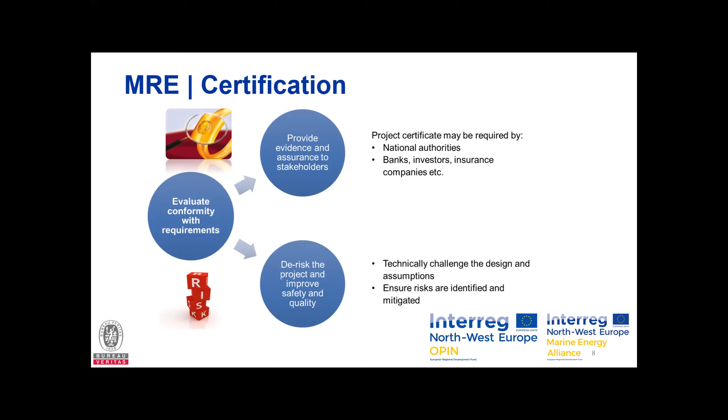As I said before, you don't have only one certification scheme, but several, depending on your project and the maturity of your project.

Let's start with the approval in principle. Typically, it will apply to a designer who develops a concept. A concept is sometimes not linked to a project, so at this stage there are still many uncertainties on some components of the product or on the environment. Typically, a designer or a floater for wind turbine may propose something, but they will have taken some assumptions on the turbine that can be selected for a concrete project, or also on the environment. The product can be designed typically for the North Sea environment or Mediterranean Sea environment, so it's a choice.

As a certification body, we propose to issue an approval in principle, meaning that we will review globally all the documents pertaining to the project, considering the assumptions made by the designers. So it's kind of pre-certification or a feasibility study. The first objective will be, once again, to de-risk the project, but also to make sure there is no showstopper in the design that may prevent further development later on in case of a project.

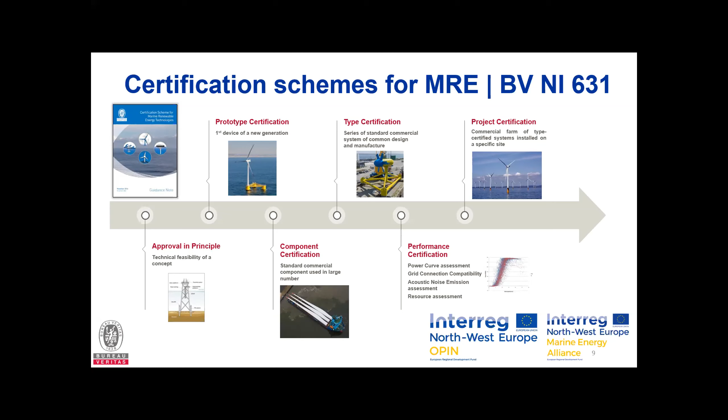So now we'll deep dive into the project certification. The first objective, once again, will be de-risking the project, and for that we'll have special care applied on the interface control. Once again, if I mention typical offshore wind projects, you have several stakeholders: the RNA manufacturer, the designer of the floater, and the project developer. Each of them will have some specific scope of work with boundary limits which are clearly defined. But what happens at the interface between the two designers can be a concern. As a certification body, we'll make sure that the inputs coming from one designer are considered by the other.

Typically, if the designer of a floater is in charge of generating the RAOs, so the response of the hydrodynamic response to the floater, they will have to inform the turbine manufacturer of the floater response so that it can be considered in the design of the RNA and the tower. The certification body will also verify all these interfaces. It concerns each module of the certification - I will come back to that. But it's not only the basis of methodology, but also the loads that will be verified by the certification body, and the detailed design, meaning the structural drawings will also be verified.

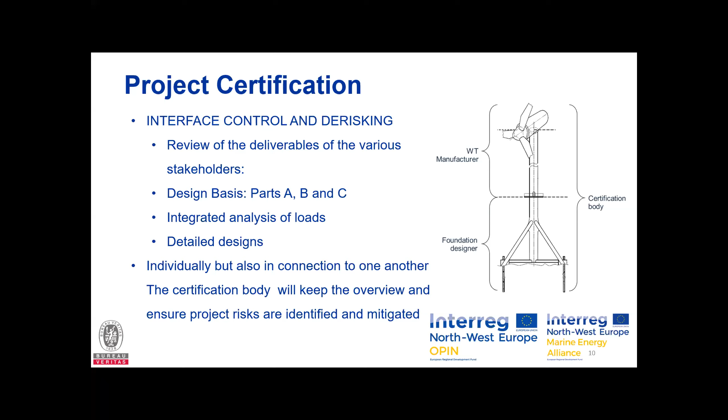Here, basically, we will review everything related to the geosciences and the environmental conditions: wind, wave, current. That will be, in fact, the data for the next phases.

Second is the design basis evaluation. The design basis will list the different technical standards applicable to a project for the wind turbine, the floater, cables, everything, and usually it's split into several documents. You will have design basis part A, which is about site conditions and employer requirements, because sometimes the project developers will have specific requirements to be considered by the designers. So it will be in the design basis part A.

Design basis part B will focus on the RNA and the tower, so typically it refers to the scope of work of the turbine manufacturer. Design basis part C, usually, is for the foundation, floating or fixed. You may have also, optionally, design basis part D that will cover the interarray cables or the substations, if any.

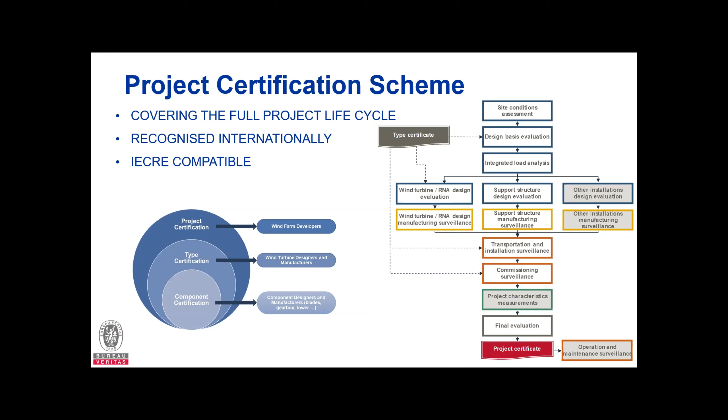So I've described the general context of the project certification. As I said, in the design basis, the technical standards applied for the design will have to be mentioned. And in BV, we have also produced a technical guide for the classification and certification of floating offshore wind turbines: NI 572, which will give some technical requirements to be fulfilled by the designers.

It was released, revised, in January 2019, and now it focuses mainly on the design phase, not so much for the moment on the manufacturing and in-service phases. It will address all the different components of the project: requirements on the material, the design loads, the stability, the structure, scantling, the mooring system. Everything is considered in these guidelines.

Just to give you an example, I will give you the example of corrosion, how it's addressed in these guidelines. We have defined a plan for the corrosion protection which will consider differently the internal and external surfaces, but also the design life of the structure. When I say design life, it should also include the installation life. So typically, if we say the design life is 25 years on site, the corrosion protection should be designed for this specific life.

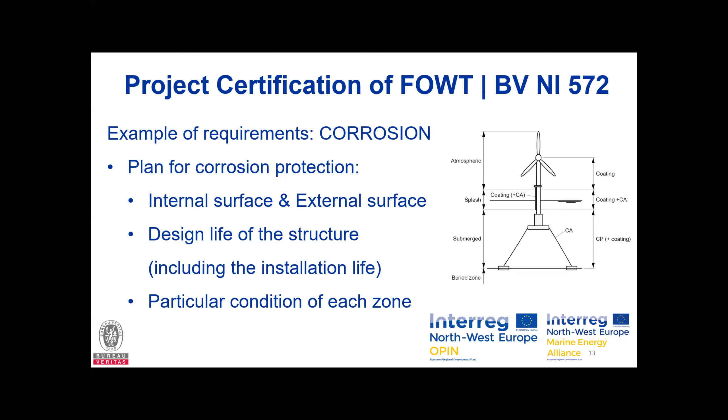For each of these zones, we specify different corrosion protection methods. At the atmospheric zone, we will just ask for a coating. For the splash zone, which is most sensitive to corrosion, we'll ask for a coating plus corrosion addition—I will come back to the definition of corrosion addition. Finally, for the submerged zone, we'll ask for cathodic protection and eventually coating depending on the type of component. Typically, if access is difficult for inspection, we may also ask for a coating.

So I said that usually we will ask for a corrosion addition. Corrosion addition is in fact a corrosion allowance that you will consider in the design of your structure. When you perform your structural calculations, you will have to deduct a thickness representative of the corrosion loss seen by the unit during the full service life. To calculate it, we give some values in our rules as guidance, because it can be different if justified by the designers.

What we suggest is to use a corrosion rate of up to 0.1 millimeter per year. And of course, you will not apply it to the full design life, because you will also consider the coating, if any, so you can remove the coating life.

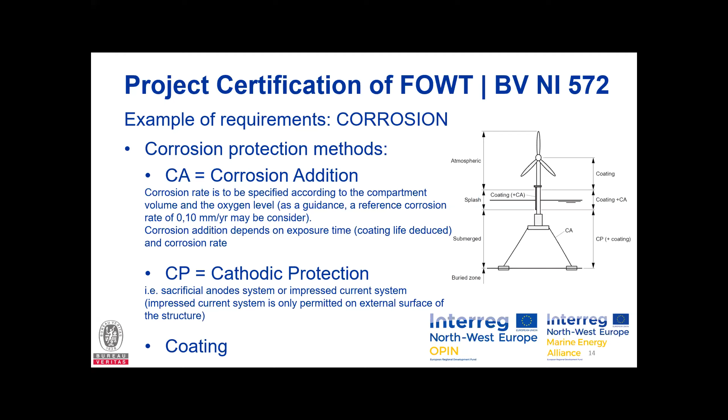Okay, so that's it for my presentation. I will take questions at the end of the webinar.

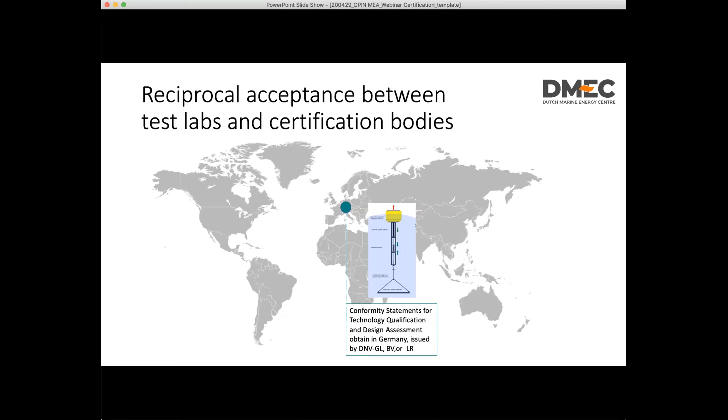The same kind of terms my colleague mentioned. Now, the next step is you've raised your capital and you're going to test, and you got access to a test berth at EMEC, an open test facility on Orkney in Scotland. They're accredited under the system to do power performance testing and assessment of tidal energy converters or wave energy converters. So you test your device there, and they issue a test report under the IECRE system.

Again, you use that as part of your documentation to build up credibility around your technology, to de-risk it and raise capital, because you want to borrow money at the lowest rates, and you can reduce rates and internal rates of return by presenting a credible route to market.

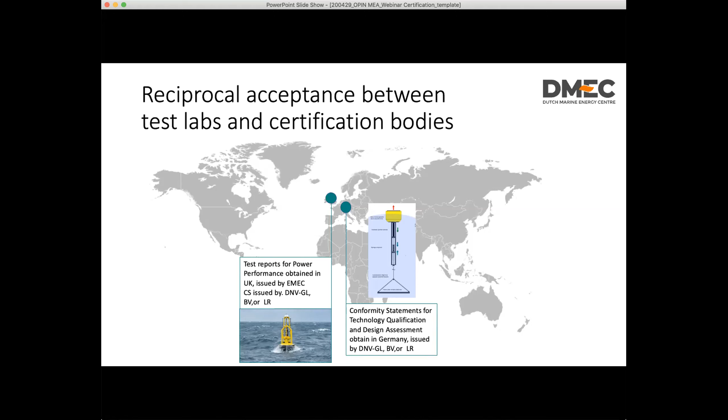So your next step is that you're going to manufacture and sell a project in Japan. The manufacturing takes place locally, and it's also done as an assessment, maybe with a local ClassNK as a certification body, working under the IECRE system. This whole process may take a couple of years if you've got experience in the sector, but all the documents you build up will work towards that prototype certificate, type certificate, or project certificate.

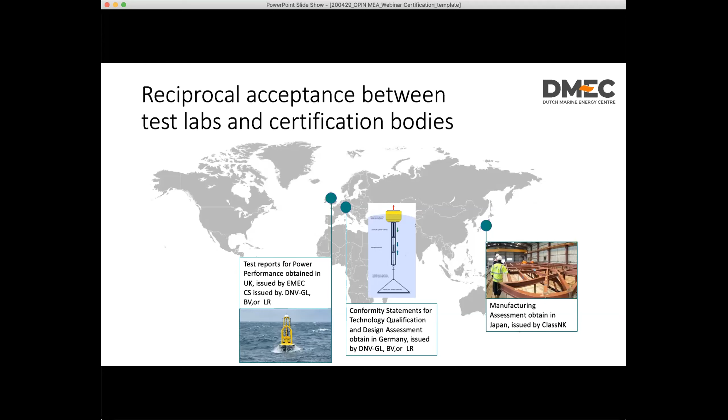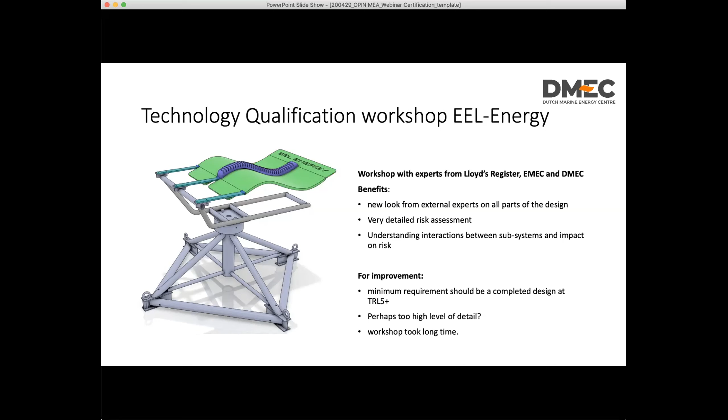So what I started with is that I would like to invite people to become more involved in the IEC. It will help you to get access to early market intelligence. It is a network of over 100 experts worldwide in 26 countries.

So yeah, in previous times, we would always get together somewhere in the world, and probably in the future, there will be, we look forward to that possibility again, but you hear a lot from each other on what is happening in different continents. It will also help you to focus on your innovation because it gives you a tool set to apply, a common language.

And by applying this, you really open up global export for your technology. You reduce risks, you increase confidence in your technology, and thus get access to commercial funding. So this is my presentation. Thank you for your attention, and I give the word back to Laura.

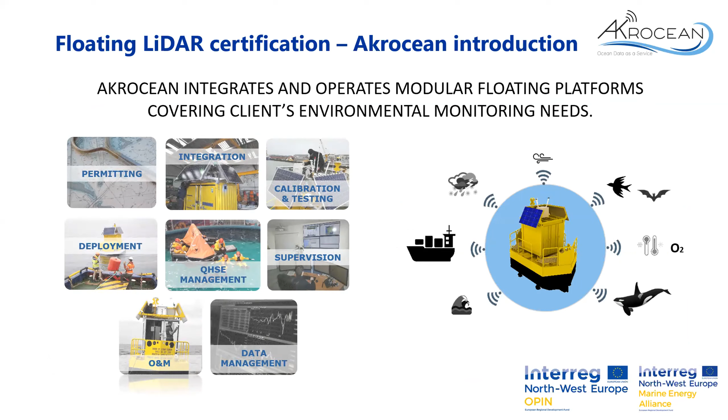We have developed 3 services today. The first, for offshore wind assessment, is a floating LIDAR — a system that assesses the wind conditions of an offshore site. We are also developing a bird and bats assessment service through a floating 3D radar, a system able to assess bird activities on an offshore site before any construction. And more generally, a full sea observatory station to assess the initial site conditions of an offshore site.

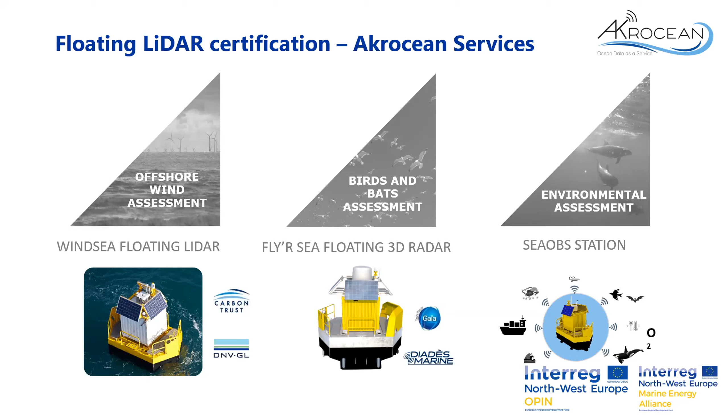Our current projects: our first experience was with Meteo France 3 years ago, for a 1-year commercial wind resource campaign off Oléron Island in France. We have recently won a 4-year master service agreement with Meteo France, for measuring wind and metocean conditions on new French offshore wind areas — representing around 5 to 6 campaigns over the next 4 years. We have deployed a system, which I'll talk about later in my presentation.

For the certification of our system, we deployed it close to a met mast in the English Channel. We have also performed tests offshore Rotterdam, to check our new systems are compliant with the roadmap. Recently, we have secured a contract with Energinet, the Danish national transmission system operator for electricity and gas, who are in charge of assessing new offshore wind areas in Denmark, similar to Meteo France in France. Also last year, we started a 2-year wind and metocean campaign for the Star of the South offshore wind project in Australia, which is one of the biggest offshore wind developments in the world currently.

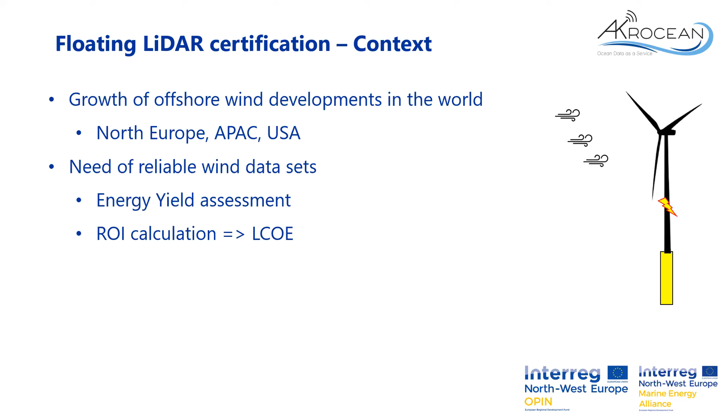There is a need for offshore wind developers and investors to get very reliable wind datasets, because the wind dataset will be the direct input for the energy yield assessment, which helps calculate the return on investment for the life cycle of the project.

And that directly contributes to the LCOE of the project. A last element of context: today there are new techniques and methods of wind measurement, especially LIDAR technology. LIDAR is a recent technology that was replacing met masts onshore, and that's now the case offshore.

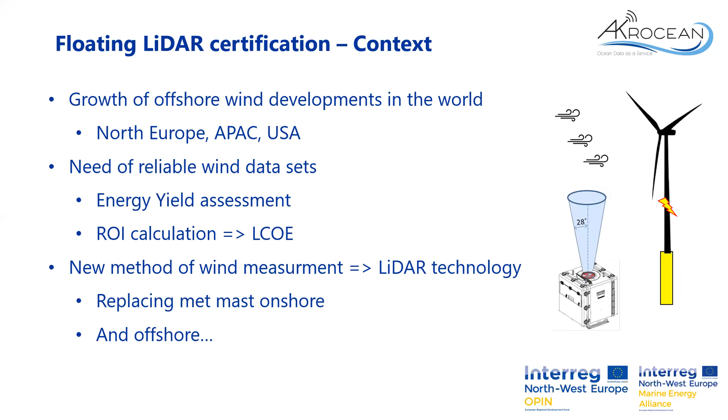So the challenge for floating LIDAR, as you can see on the screen, is to replace the met mast in the offshore met mast setup with floating LIDAR technology.

The big challenge is to bring confidence to investors in floating LIDAR wind datasets, replacing the trusted met mast measurements. The met mast is the old and reliable technique to assess wind conditions, so it's necessary to give trust and confidence to developers in the new floating LIDAR technology.

There are benefits to using floating LIDAR instead of met mast, which costs 10 to 50 times more to install at sea. That directly contributes to LCOE reduction, and also lower risk to deploy this kind of floating system.

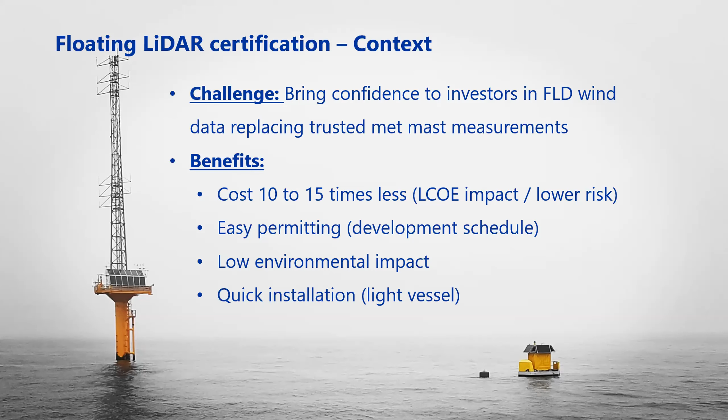The floating system is very easy to permit, which allows more visibility on the development schedule and development phase of the project.

Floating LIDAR has a very low environmental impact compared to the met mast, which requires a lot of impact assessment to permit the installation of the system.

And the system is very easy and quick to install, so we can just use a light vessel in comparison to the met mast.

But this new technology has some risk. There is low experience and low track record in the industry using this technology, and the buoy is more impacted by environmental conditions such as waves, currents, and strong winds, which could impact the delivered datasets.

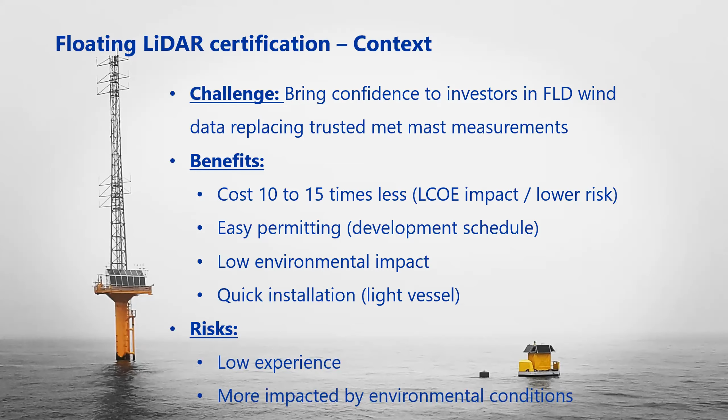To develop this technology, a few years ago the first revision of the Carbon Trust roadmap was published in 2013. The Carbon Trust Offshore Wind Accelerator is a joint industry project composed of 9 developers, research institutes, and offshore wind consultancy companies. They have drafted a roadmap, a guide for floating LIDAR to become commercially accepted and reputed to provide bankable data.

Here we have the difference between certification and qualification, because there is no existing standards or norms ruling floating LIDAR certification. There is only a roadmap, which is why we use the term qualification of the system instead of certification.

We have been told recently that there is an IEC working group open to develop and publish work in the coming months for floating LIDAR certification. We will be involved in this work, and I will be pleased to share interesting information about this working group in the coming months.

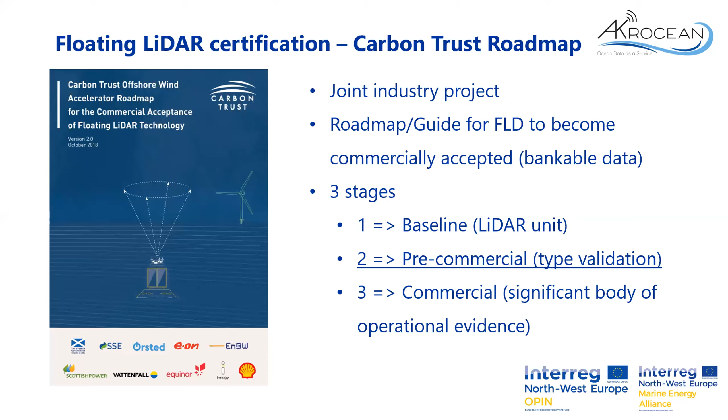So the stage 2 process we have done is the type validation trial of 6 consecutive months against a trusted measurement source, a met mast or a fixed LIDAR. So we have done our deployment against both technologies. The met mast you see on the picture is also equipped with a fixed LIDAR, so we have assessed against the 2 systems. So what is assessed?

One of the key facts assessed is the system availability. The stage 2 requires that we have to be over 95% availability during our whole campaign, and 90% monthly.

Then post-process data availability is also assessed. We have to be over 85% during all the campaign and 80% monthly.

The data accuracy is also assessed. It's the coefficient of correlation between the floating LIDAR and the met mast, for wind speed and direction. We have to be over 0.97 for the wind speed and 0.95 for the direction.

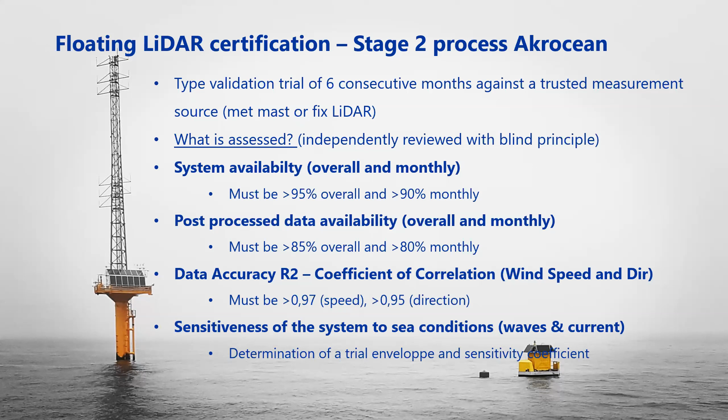There is also a sensitiveness study of the system, and we are assessing the impact of sea conditions, waves and currents, on the accuracy of our system. The objective is to provide an envelope and sensitivity coefficient of our trial during the 6 months.

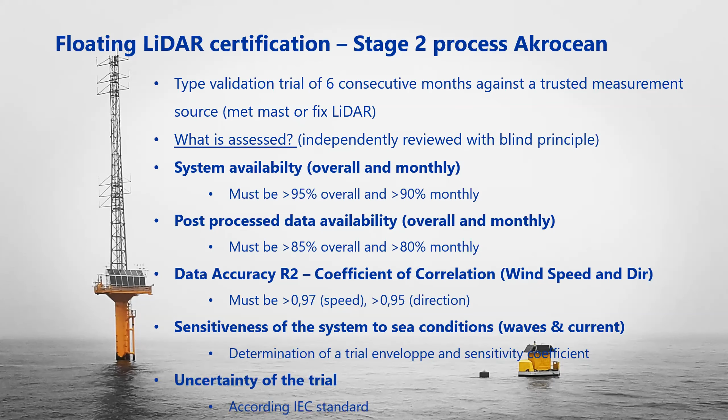And there is an uncertainty assessment also performed according to IEC standards. Regarding our test, we have performed a 6 month test in the English Channel, from April to October 2018, at the Fécamp Offshore Wind Mast.

This is the result we have obtained during this 6 month trial. We have passed all the KPIs set in the roadmap, the stage 2 KPIs, but we have also passed the stage 3 KPIs that are recognized as best practices of the industry.

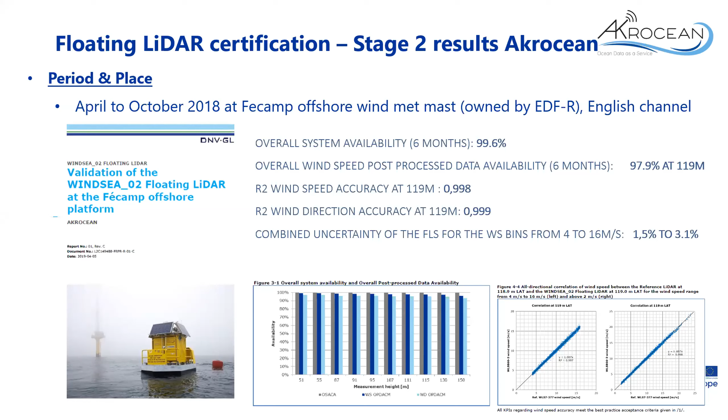But this trial did not give us access to stage 3, because we have not proved evidence of commercial deployment yet.

Here is the conclusion of DNV GL, who has independently reviewed our 6 months trial. The conclusion says that our system has formally qualified, this is the difference, qualification and not certification, for the stage 2 pre-commercial status in the context of the Carbon Trust Offshore Wind Accelerator roadmap.

It is also mentioned that if we change something on our floating LIDAR, the LIDAR unit itself or the float, it is not considered the same system. So to confirm our system is valid as stage 2 for the roadmap, we need to use the same type for our commercial campaigns.

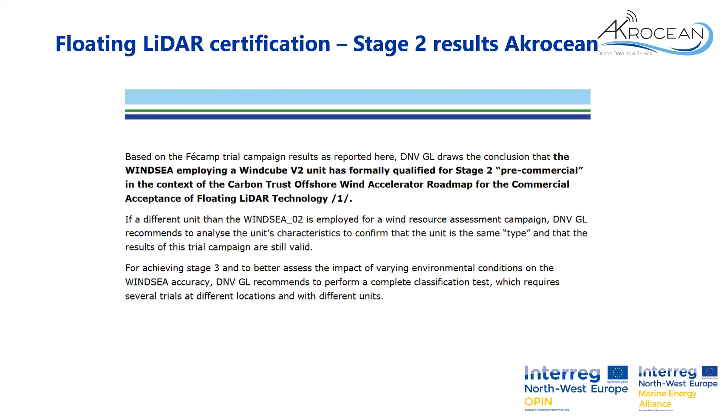Quick facts about our technology, I will go through this quickly. We use the SEAWATCH techno system, which also provides passive stabilization, good for mounting a LIDAR system on our platform. We use a wave energy converter combined with solar power capacity to provide power. We use WindCube LIDAR on top of our system, and we have a control room with backup power inside using methanol fuel cells, not diesel. We can also combine a lot of other measurements on our platform.

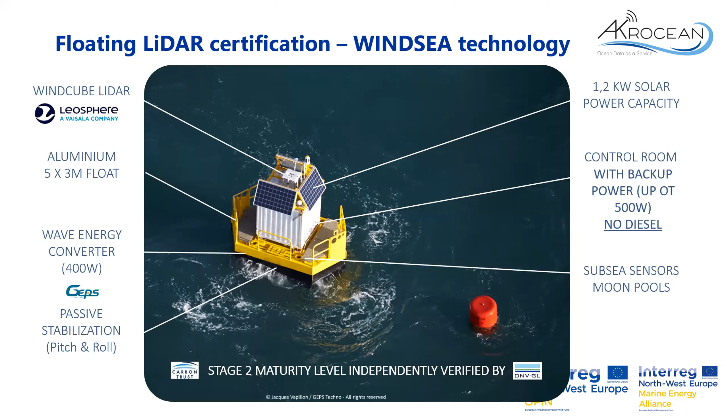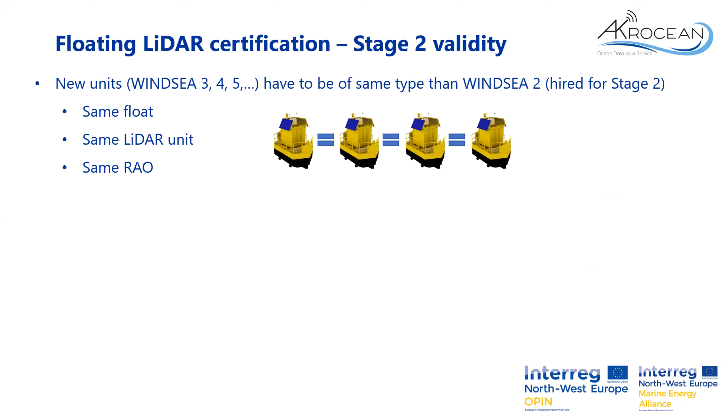The stage 2 validity, as stated in the DNV GL conclusion, means that if we provide new units, they have to be the same type as our WINDSEA 2, which is the unit we used for the stage 2 trial. That means we use the same float, the same LIDAR unit, and the behavior at sea of our system has to be strictly the same to confirm we will deliver the same quality of data.

To confirm that, once we have reached the stage 2 validation, we have to verify the new system before each new commercial campaign. Each new LIDAR unit has to be verified onshore, close to a met mast. Then we have to test each new floating LIDAR of the same type at sea, in the same conditions as the stage 2 trial, but over a shorter period, 1 month. That means each time we manufacture a new unit, we have to test it at sea close to a fixed LIDAR for at least 1 month.

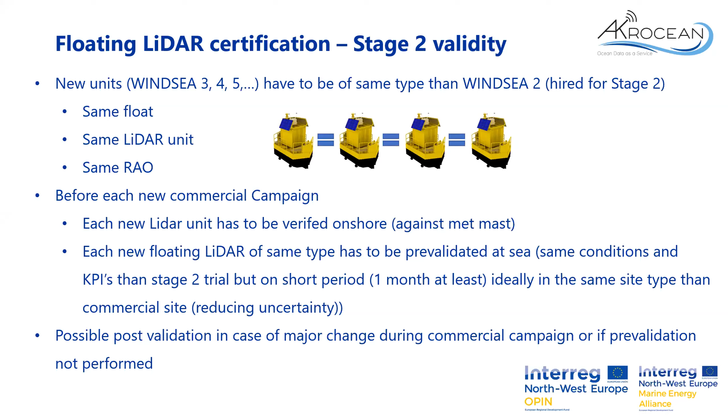There is also a possibility to do post-validation in case of a major change during the commercial campaign, to prove the validation of our system, because sometimes we can have a problem during the campaign. The commercial campaign is approximately 12 to 24 months, so if you have a failure and have to change any component on the buoy which could impact the quality of the data, you may have to perform post-validation under the same conditions as the pre-validation, to confirm you are able to provide the same quality of data.

So stage 3, approaching 20 minutes of presentations, and I will pass briefly on that. So just to give you an overview of stage 3.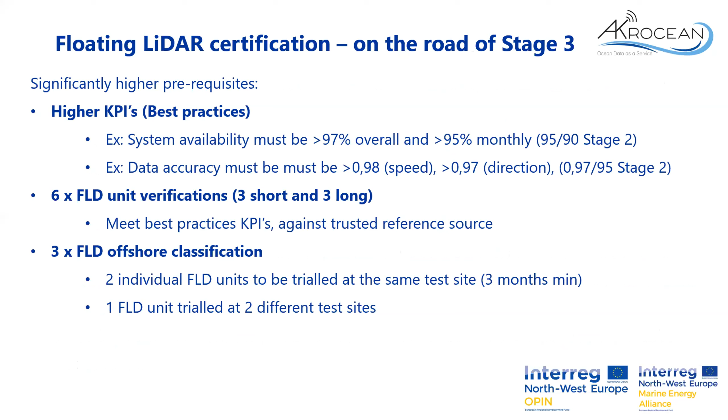Stage 3 in fact requires higher KPIs, known as best practices. So the system reliability has to be better, and the same for data accuracy. We have to confirm also 6 unit verifications.

Verification has to be performed close to a met mast or close to a fixed LIDAR, 3 short and 3 long campaigns, meeting the stage 3 KPIs.

Also we have to perform floating LIDAR offshore classification. That means we need to deploy 2 floating LIDAR units at the same test site for 3 months minimum, and confirm they are able to provide the same level of data quality. And also we have to test 1 floating LIDAR at 2 different test sites to cover a large range of environmental conditions.

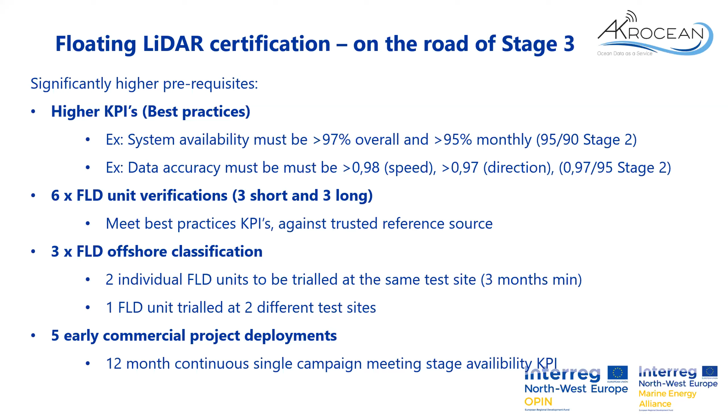And the last requirement for stage 3 is to confirm 5 commercial project deployments where the availability of your system will be assessed during at least 12 months continuous campaign, meeting the availability KPI of stage 3 of the roadmap. Thank you for your attention, and open to some questions at the end of the webinar.